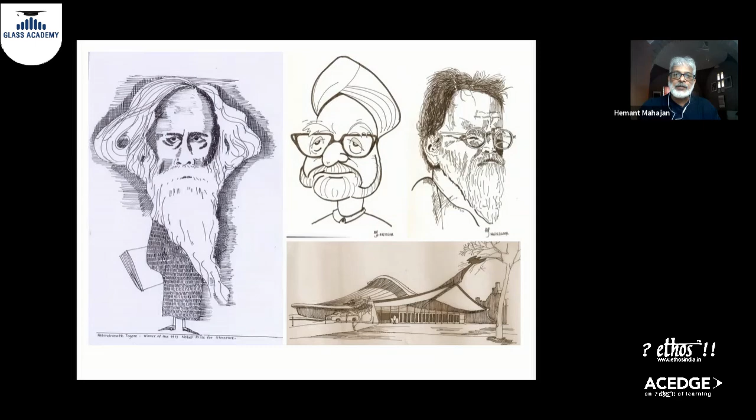But as an architect, why am I explaining all these sketches? Sketches for me are - I always started the work with sketching, with watercolors, sketching with pen and ink.

Last year only, we completed 3 decades of architecture. Every 10 years down the line, we do a program at our office, and we call all these personalities, our teachers, for their blessings.

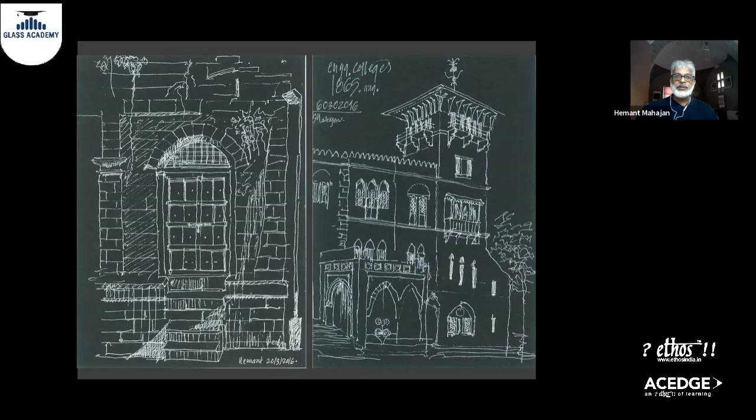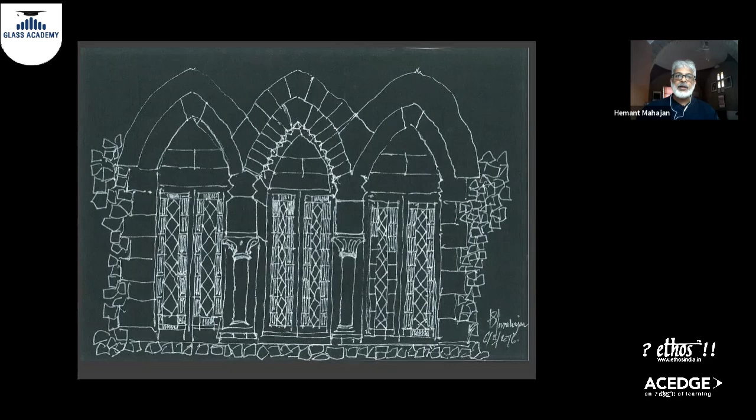Of the history, seeing the engineering college - this is the stonework. I enjoyed sketching with black and white, with color pens, the heritage of the old city.

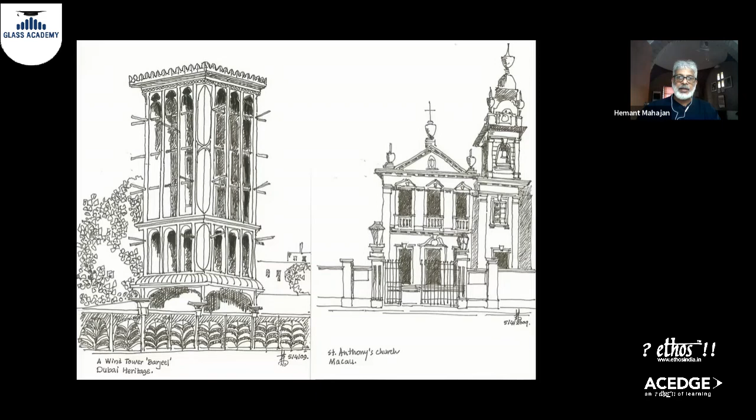Wherever we go for travel, I always started doing sketching. So with the sketching, I tried and imitated whatever I had seen - I saw the proportions, I saw the massing, composition, everything, and a different approach is developed while going through all these studies.

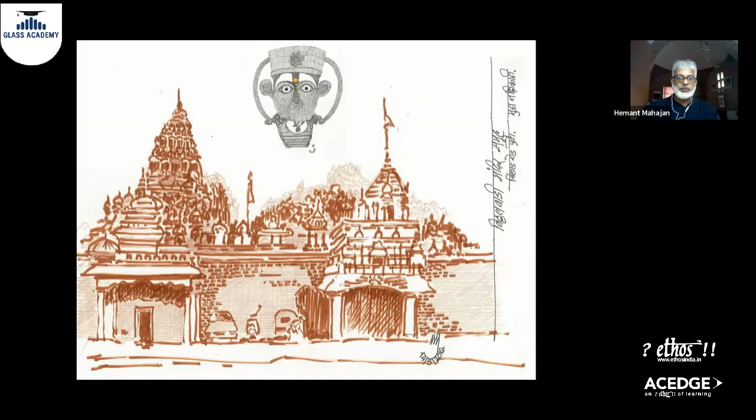So these are the different experimentations I did with color pencil, pastels, then markers, watercolors. These are the thrown out sketch pens which are dipped into water and sketches made out of that.

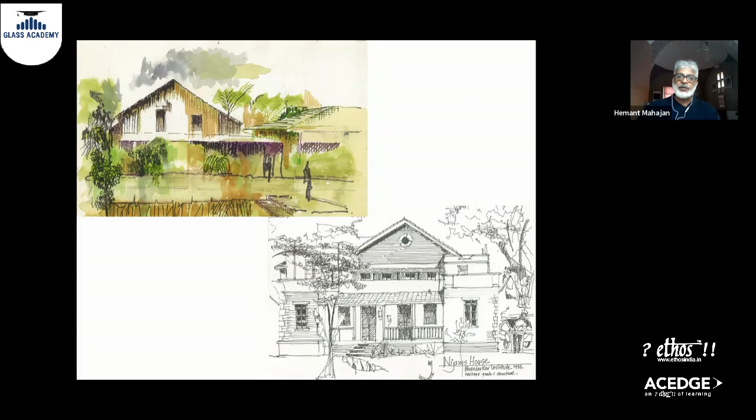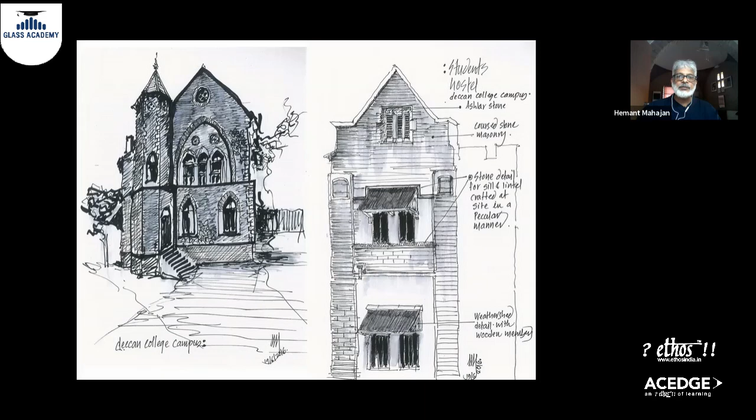Here again, studying the details of a 150-year-old structure and going into the details of construction technology. So through sketching, what I have learned till date - yes, I have studied the history. I made the analysis - geometry, scale, proportion, massing, etc. - have been studied because of this habit of sketching.

So for me, what is design? This is analysis, synthesis and evaluation. What are the aspects of design? These are my way of looking at design.

It is utility, functionality, originality, end user and aesthetics. These are the 5 prime points of importance for me to work on for the last 3 decades.

As a designer, every designer should have the goal to quickly provide the appropriate design solution. Whatever you design should be respectful to its setting, designed and constructed within a specified time and budget constraint. It should be innovative and serve the ultimate users.

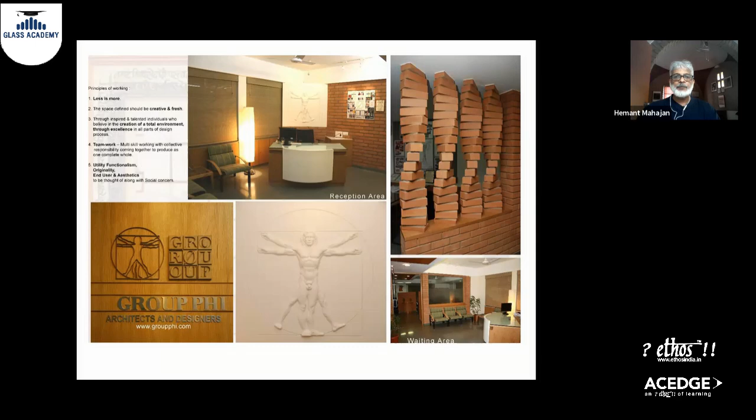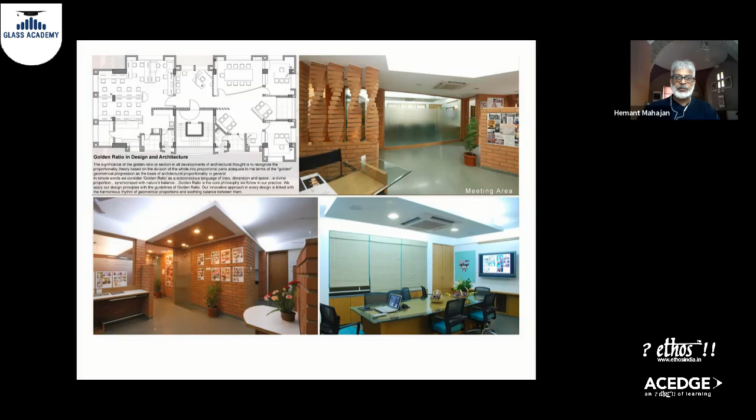It's a small office with segregation of staff, meeting rooms, a model space. Everything we do is displayed in a panel, before and after, inside the office to create a cheerful environment.

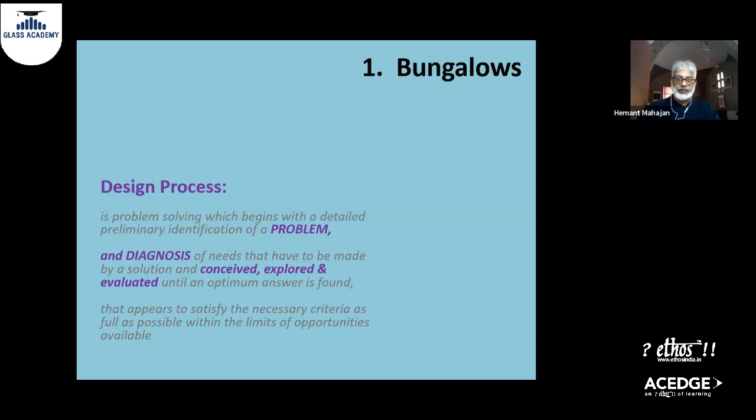So we'll start with the smallest bungalows. For me, design process is problem solving which begins with a detailed preliminary identification of a problem and diagnosis of needs, from which a solution is conceived, explored and evaluated until an optimum answer is found that satisfies the necessary criteria as fully as possible within the limits of available opportunities.

We'll go into the small bungalow, which is around 10,000 square feet plot. Regarding the owner's need, I'll go to the brief: the basic objective behind this project was to create a sustainable and energy efficient home for the family.

The house was designed for the husband, wife and their son. They wanted a new bungalow with a feel of warmth, comfort, and a very simplistic, down-to-earth, close to nature interior. The new house should be environment friendly, easy to maintain, yet have all modern automation facilities, and maximum connection of indoor spaces to the outdoor natural greenery surrounding the plot.

So this was the basis they gave us, and we developed this solution. On the lower level there's a study space; on the right side, servant quarters, then the car parking area, and a central area of around 3,000 square feet connecting the green spaces. At the first level are the bedrooms, living room, central court, and kitchen dining facility. At the second level, one bedroom and one study. So the requirement was small, but the masses and everything were developed accordingly.

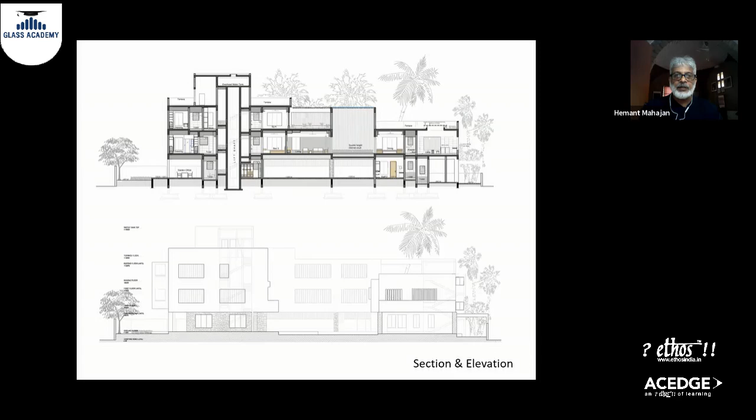The project is in an east-west direction. So this is the output. You can see the simplicity of the structure, the connection, the materials, the exploration of different forms. A tropical effect was tried and developed inside the campus.

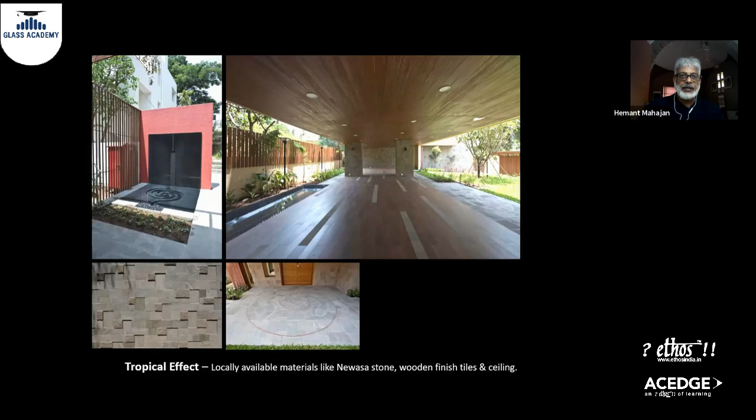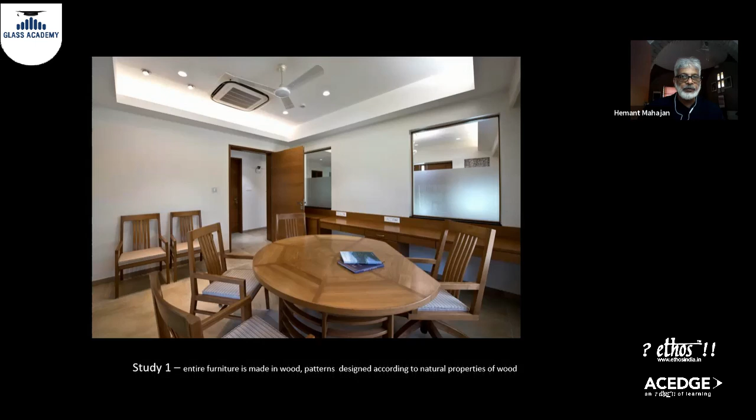This is the entrance lobby. The entire furniture is custom made and everything is indigenous. All the furniture, architecture, everything is designed in-house. See the colors, the freshness, the connectivity with the outdoors, the central court.

People always remind us of such spaces during the pandemic period. We received many phone calls from these resident owners saying they enjoyed this surrounding. Though they were not going out of the campus, they were in a different situation and still enjoyed life.

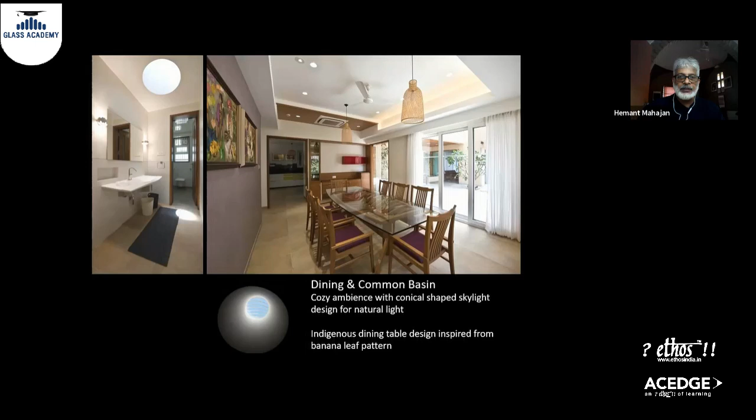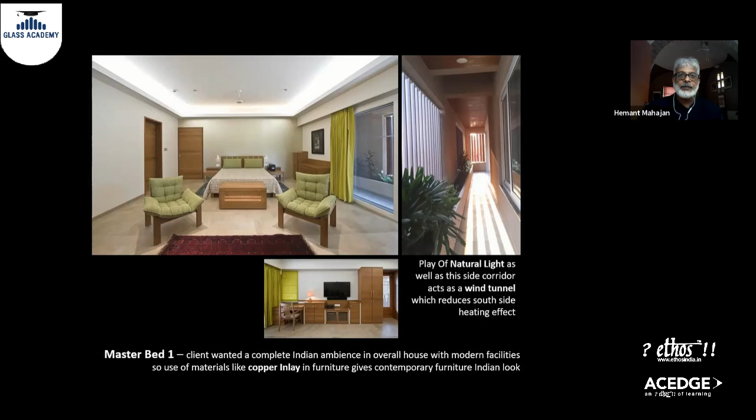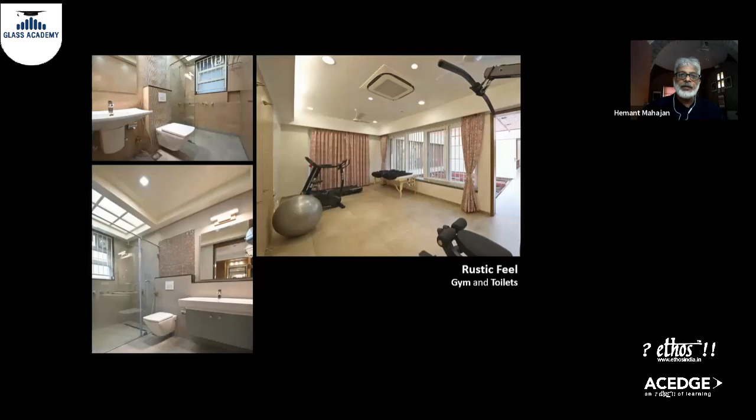You can see the outdoor connectivity, sun rays coming inside, the freshness of the tapestry and combinations, the play of natural light inside the corridors, making a buffer on the south side, a contemporary wooden look but with bright colors. Everything is designed as per the need of the person.

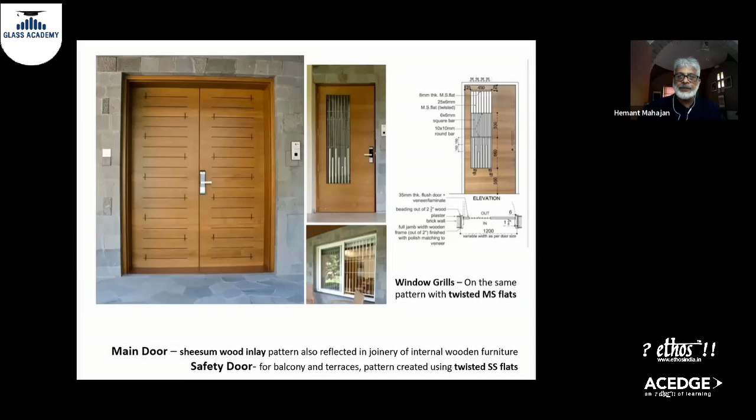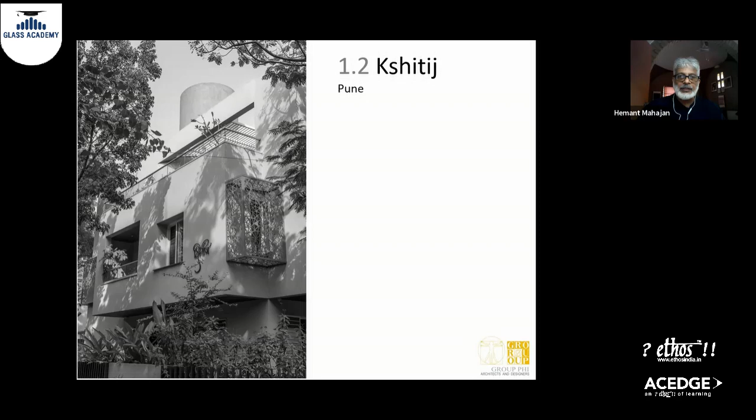This is the second bungalow, again for an industrialist. The industrialist has started a factory of laser cutting, and whatever they want to showcase, we have showcased their personality into the residence.

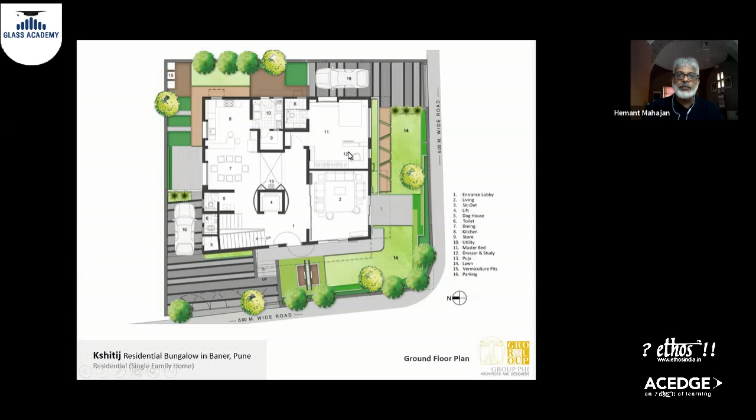The living, kitchen, dining, one master bedroom, with 1, 2, 3 bedrooms on the upper level for 2 sons, then music room, and on the terrace level, entertainment area with connecting outdoor spaces. You can see in section the different double height spaces as well as penetration of light you can see from the sky.

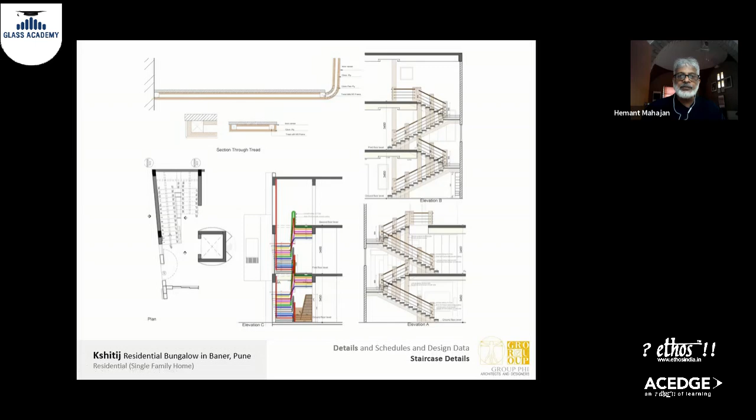The details of the staircase. Every element is designed as per the individual need.

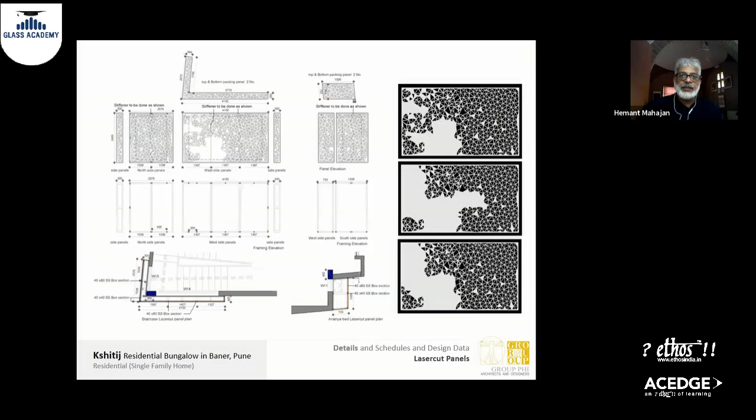The laser cut grills, again you can see this. So existing trees making an entrance for the bungalow - juxtapositioning made of each tree and entrance.

Even the 3D paintings were developed for the first time. Canvas we can say is always in 2 dimensions - we said why should we look at the canvas in 2 dimensions? So we developed the 3-dimensional painting and it changes as per our need, and we can change the combination.

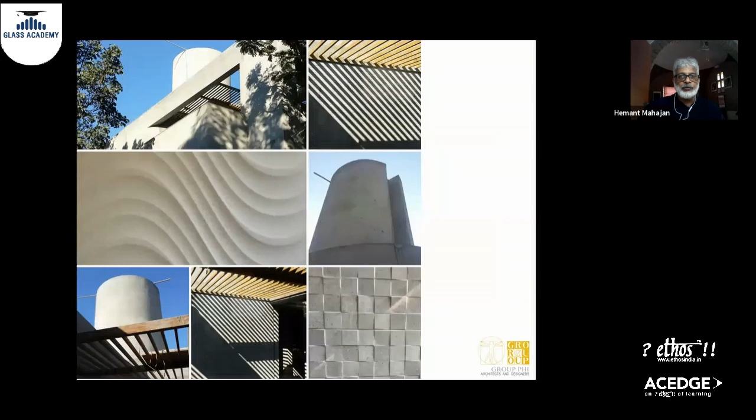During the site visit, always seeing the various combinations of shades and shadows, use of different colors, textures - it's an interplay of form merging with the nature.

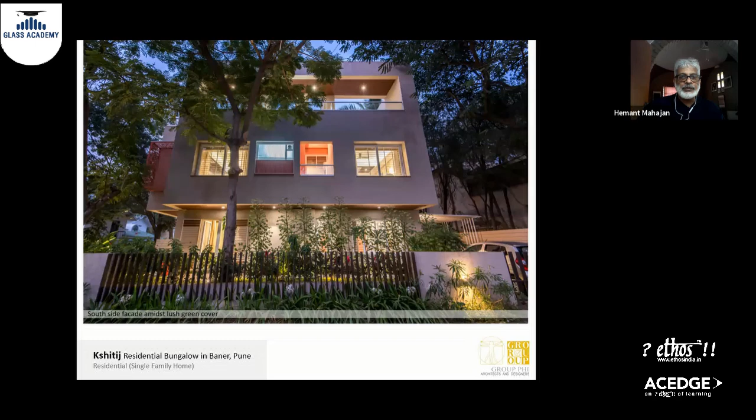This is the south side facade amidst the green cover. Again, the same thing - everybody enjoys such covered but connected with the outside world terrace. They enjoy their life at the lower level as well as at the upper level. Relaxing terraces, covered terraces, which are created for themselves.

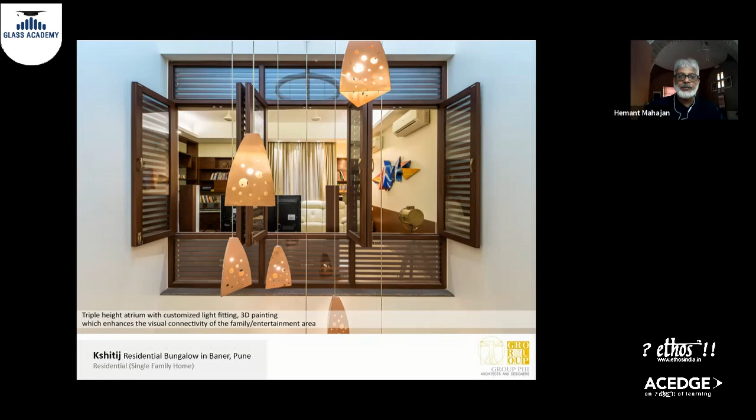Even these light fittings, which are displayed in the triple height area, have been designed from outside. Very fresh colored interiors, right up to the smallest detail has been thought of.

So design is a creative activity whose aim is to determine the form of the object, system, and environments at every level of production and activity.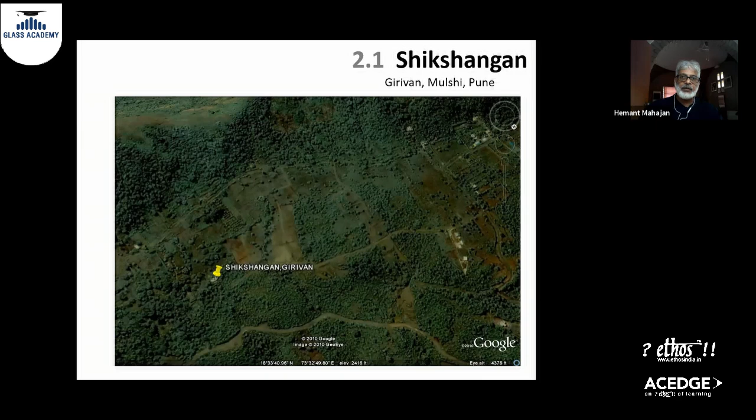Now this Shikshangan is a farmhouse located around 40 kilometers from the city of Pune, located on the uphills of Girivan. Here you can locate only a single house which was done 15 years before.

I will just read the owner's brief, because they have given a very fantastic background during the start of the project.

We have a beautiful piece of land up in the hills, which seemingly is at the end of the Western Ghats near Pune. Husband and wife have a dream of having a permanent residence on the top of this hill. We are looking at this as our primary home and not a weekend farmhouse.

In order to visualize the home for us, I need to brief you a bit about the kind of people and family we are. It is a mixed type of eclectic bunch, with Vijay who likes to spend a lot of time with books, reading and contemplation, and is a bit of a loner. Devika is also fond of a lot of reading, but includes music in her life along with theatre, and is largely a people's person. An older daughter is a product designer from NID, son-in-law again from NID.

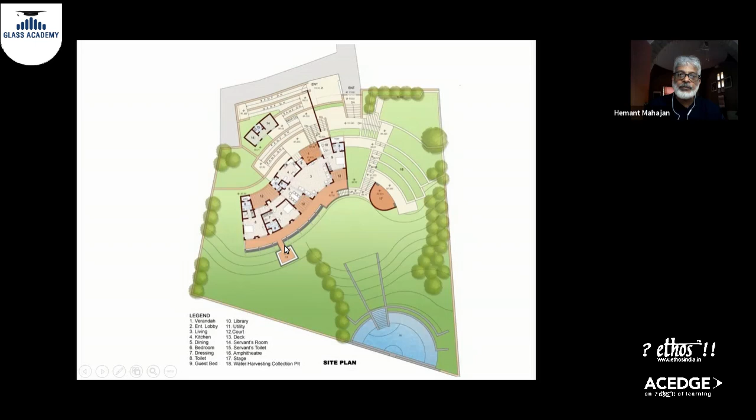You can just see the sectional development. So here we enter at the top level, and we have done this such type of farmhouse for the first time. And when we went to the site, we never recognized where the site location was.

And that's why we have created this bell tower. So whenever we are trying and approaching towards my home, we are always with that line of reference and we reach to the home.

So before the start of the work, we involve the owner and do the detailing up to the last detail and get confirmation from the owner - okay, this is what you want - and with respect to that, we execute the project.

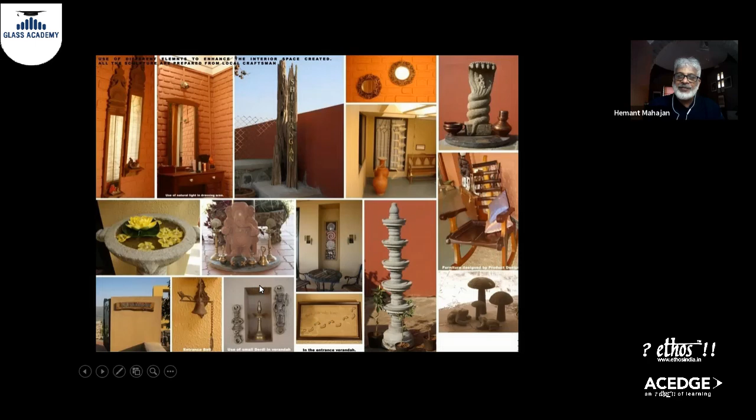A different element, full of energy and creativity. Even at the entrance of the home, what is written is 'keep your souls away'. We have not written 'keep your chappals outside', but 'keep your souls away'. This is the way we try to connect even with an outside person.

Now this is again a farmhouse, which is around 5 acres. We are trying to increase the area from 500 square feet to now 5 acres.

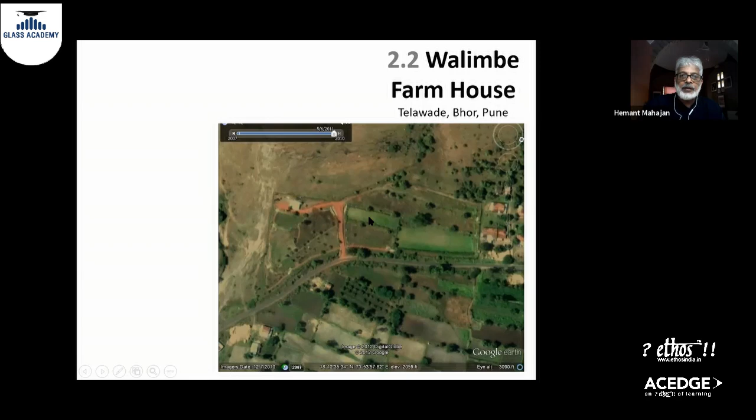When this person reached us, he said everything is done, the landscape is complete, and now you have to create a home. I asked whether this piece of land is sanctioned from the local authority. He said no, it's farmland and he is constructing on it. I said I will not do any unauthorized work, and started digging into the drawings and documents. It took around a year to get all the documents, and he patiently collected everything. Thereafter I said, this is what you have done, but it will not make a new structure for me, so I will create your structure in this new space where nothing has been touched by anybody else. Hence I started designing this farmhouse.

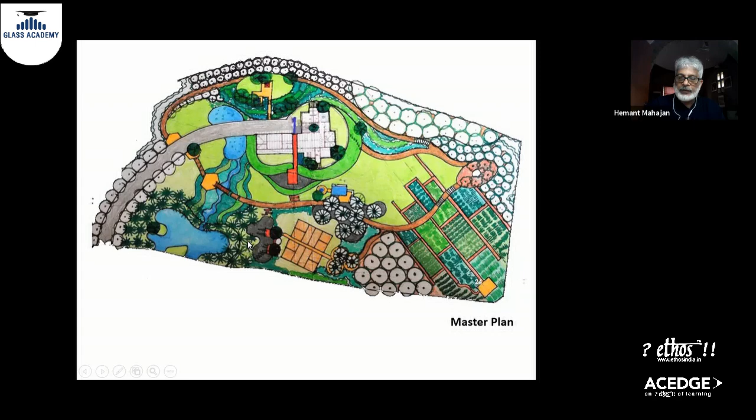We connected all the existing farming activity as it is, and they happily converted into the same thing. We restricted everything because of our budget, creating a boundary wall, and developed all the details within that area, keeping the rest of the area as it is, as per the existing landform.

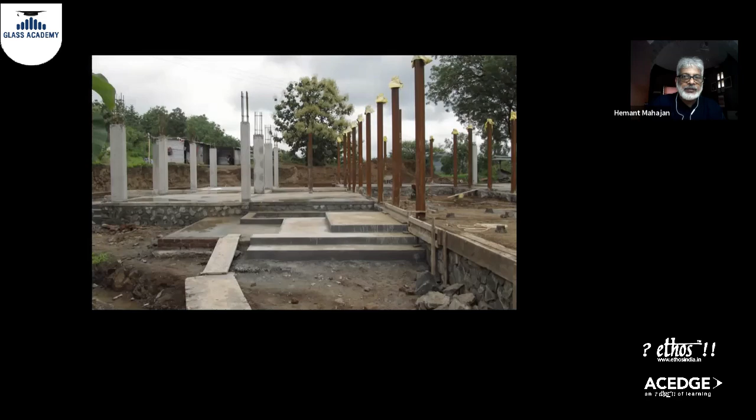Just see the sections - this is the start of development. Yes, at the start of development we always begin with landscaping, then creation at the structure level, and this is the finish. Everything was completed within a budget of 75 lakh.

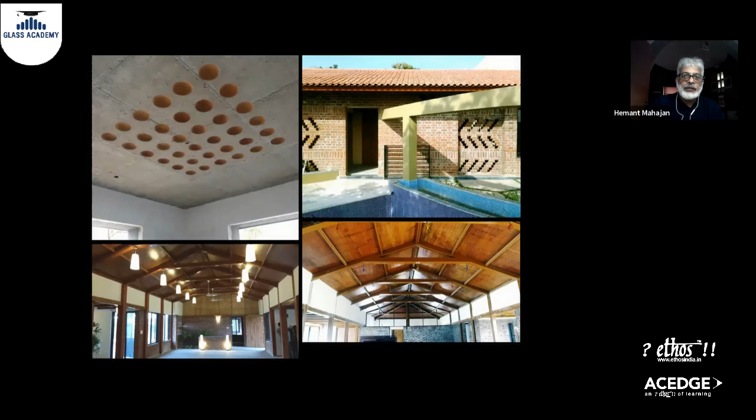We did an experimentation at the roof level. We did not use any grills, we did not use any windows - the brick jalis are my windows. No plastering, yes, exposed concrete as well as earthen pots. Use of natural light as well as outdoor space inside the toilet, and a Prabhavali creation for the puja.

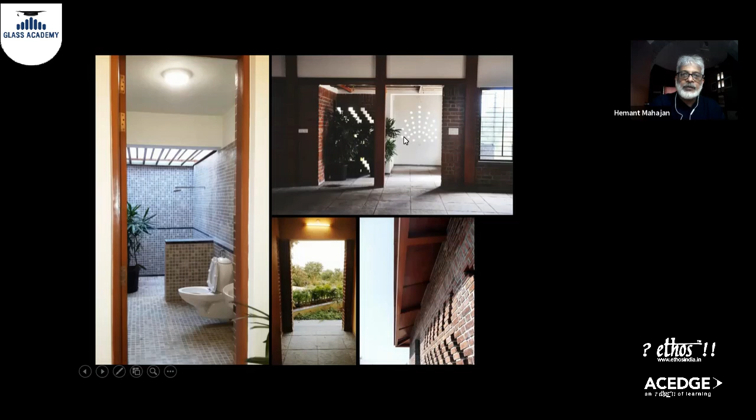So design is a product of a designer, and a product is a balance of both functional and visual elements.

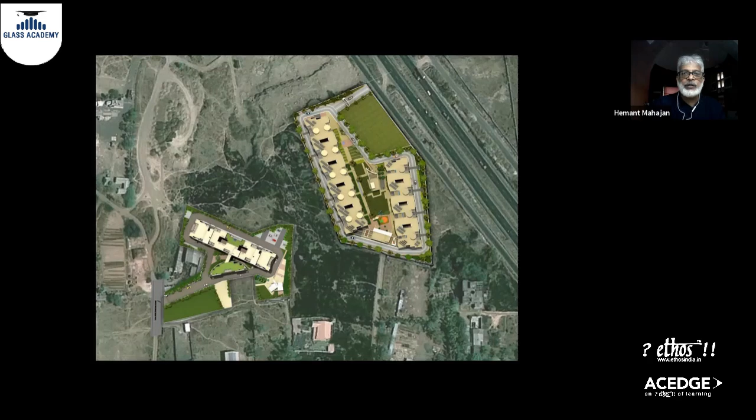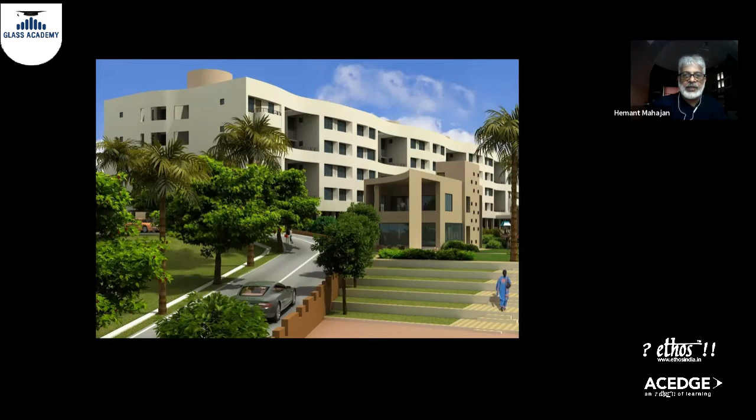On all sides, the level difference was significant, but we managed to create the architectural as well as landscape development in a beautiful manner. This is the reality.

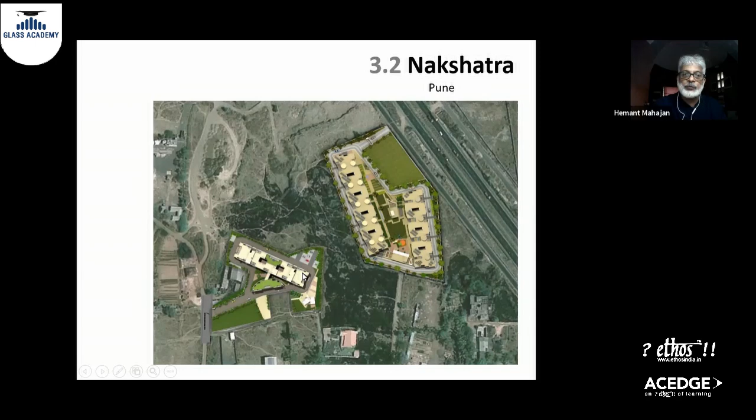The same developer has again taken additional land, and see the shape of the land. As per the shape of the land, respectful of the setting, the design has been developed in each case. Just see, in all cases wherever we go into the details of landscaping, each square inch is planned, meaning the smallest detail has been addressed by all the consultants.

We believe in teamwork. And this is the reality - respectful of the setting, the development is complete.

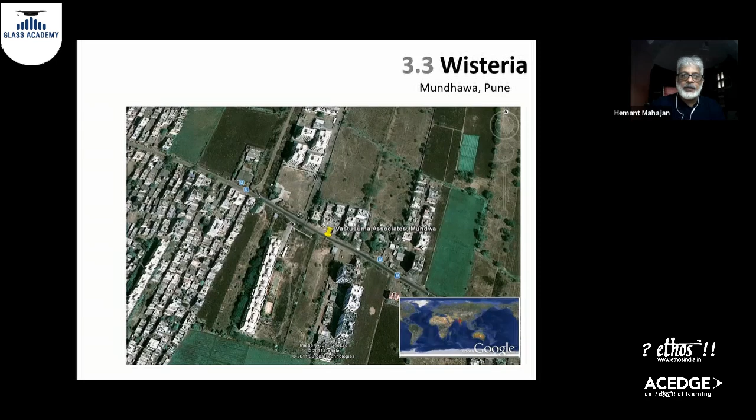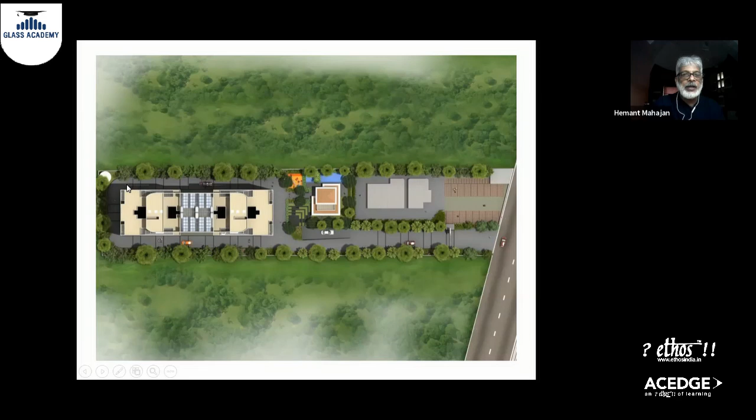Now this is on another side of the city, around Wisteria, with the site located in Mundhawa area. The site is very elongated, so as per this elongation, the site planning is done in a different manner. This is the amenity space, the central clubhouse activity, and these are the 80 tenements.

These are the spaces which are more utilized in this pandemic era, and I have visited all these places and families, and they are happily enjoying in such creation.

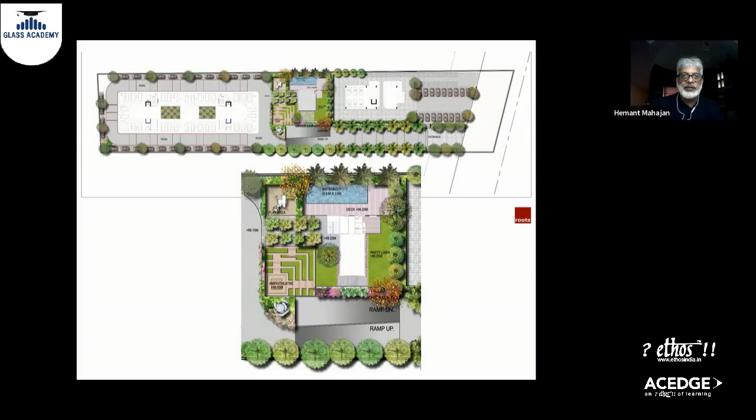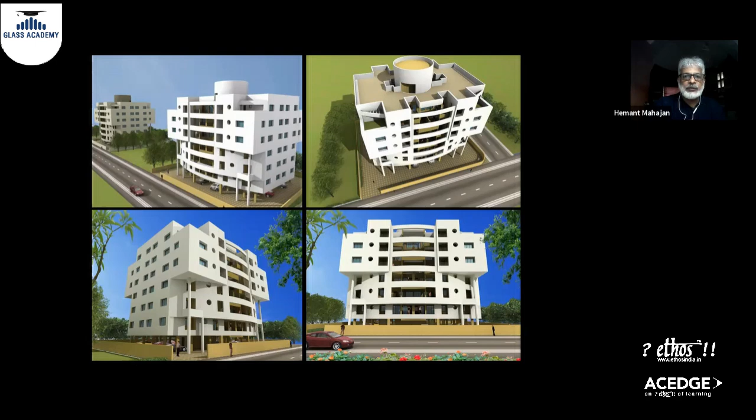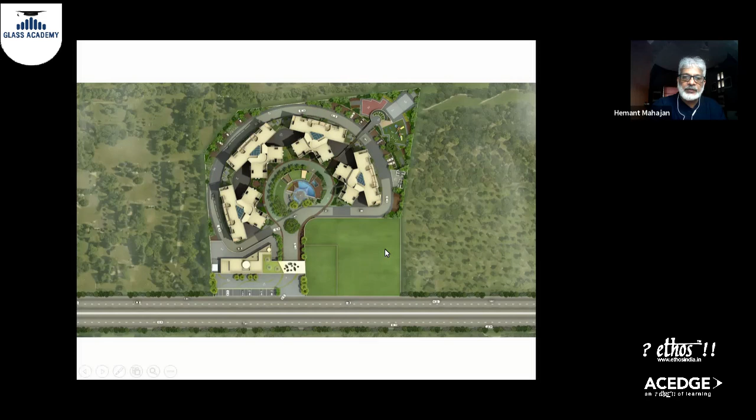We started 3 years back. The site has a level difference, so we created a 2-level parking below, but it has access to light and natural ventilation from all sides. This is the open space connected with all 4 buildings, and this is the additional open space we created apart from the regular need of 10%. This is the amenity space, and this is the commercial activity accessible from the outside.

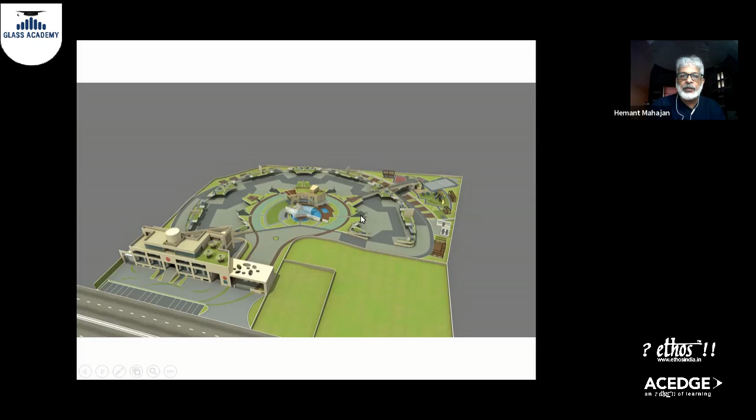Just see the site development, how connectivity has been done. Again, vehicular movement from all sides, with interconnection of pedestrian paths to all spaces without any confusion. And this is the final output.

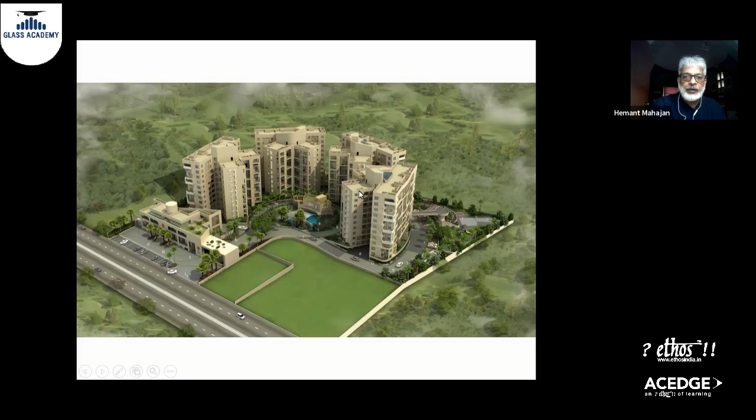At present, we have completed these 3 buildings. Due to the pandemic, the construction rate or speed is reduced, but this will be completed next year. All the flats range from 750 to 4,000 square feet, so the smallest person to the biggest families are residing in this campus, and everybody is given a different focus of attraction and well-being inside this community.

Everything at the top level with solar panels and rainwater harvesting, so all green norms are followed throughout all the projects. I am not mentioning it everywhere because this green practice has been followed throughout the last 30 years of our projects.

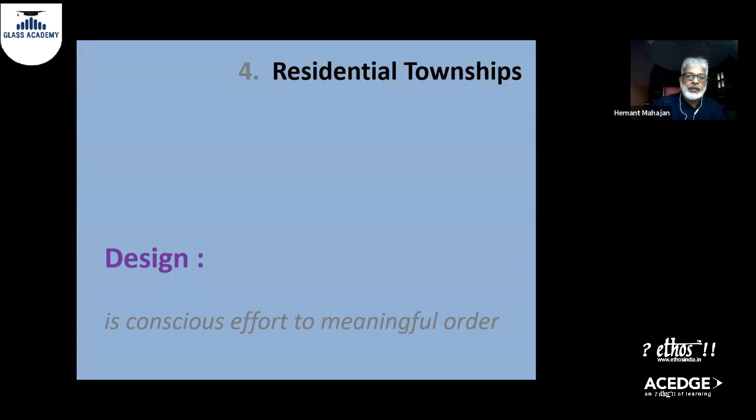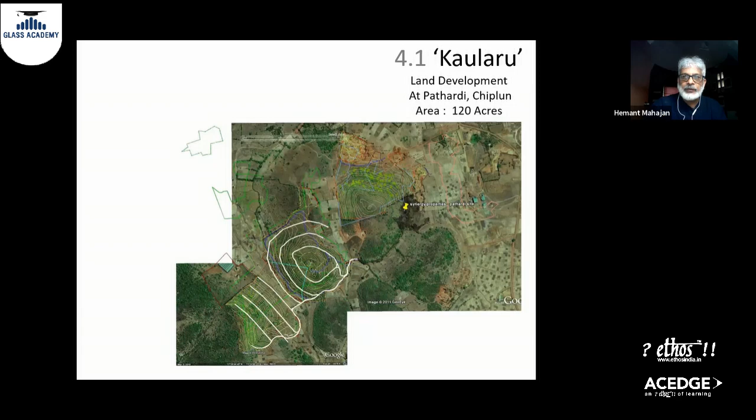Residential township. Design is a conscious effort towards a meaningful order. Now I will go into the 120 acres of planning which we have done for Pathardi, Chiplun.

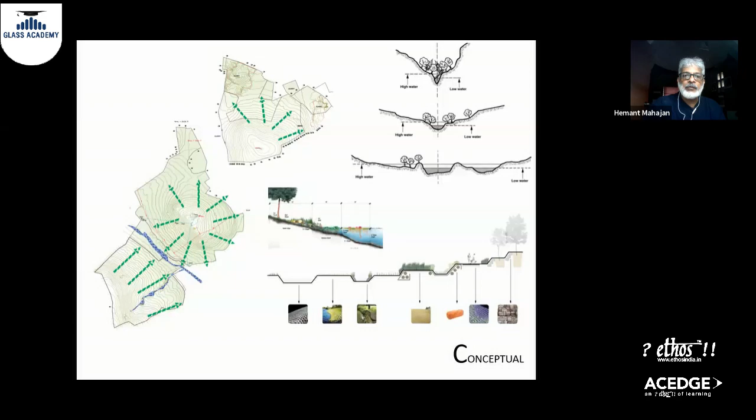Whenever we visit such places, we always go into the villages before starting the project. We study the city, we see the oldest development of the city, we study those characters, and with respect to that character our new typology and methodology has been set for our new design. So these are the first site visit, site features, the site and surroundings, and the study of the slopes and valleys. As per the regulation, the master planning is done.

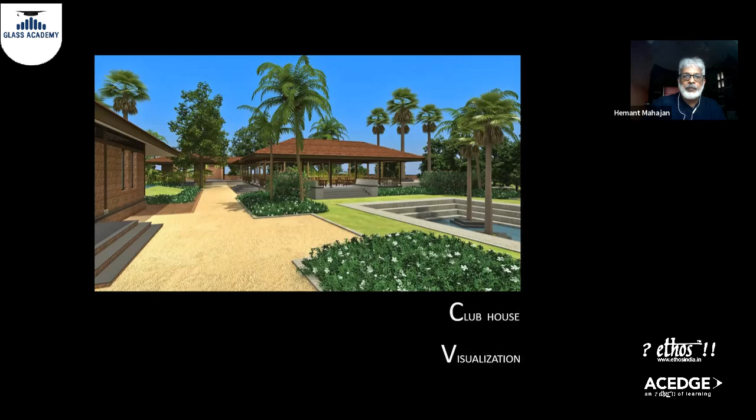Then phasing has been done of the 40 acre plot, with the conceptual development of the clubhouse, facilities, and amenity spaces. And this is the picturization of what we have done. Everything in the Konkan area is laterite, so these laterite stones are developed as the main basic stone material, and the development is done accordingly.

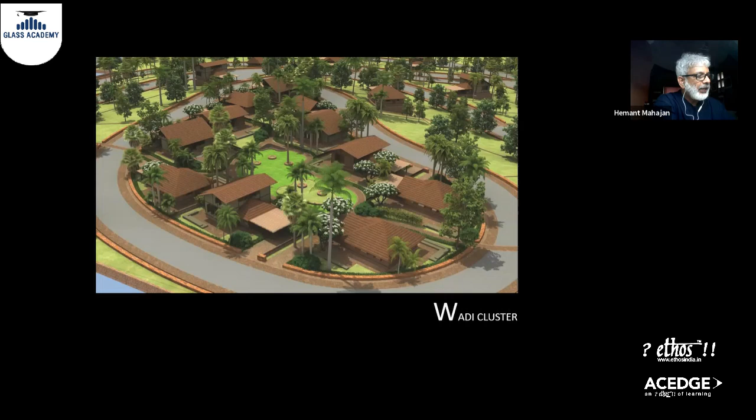The Wadi - I will go into the details of this Wadi cluster. What is this Wadi? The project is developed as an eco-friendly land development on the concept of cluster-based Wadi development, because of the site features of quarries, rainwater harvesting, and a holding tank for the entire land done at the lower end of the block. Our scope of work was not restricted to master planning, but all agricultural plots, road network, and everything inside this house as a holiday resort - spa, sauna, everything - was decided and designed from our side in an individualistic manner.

All these Wadi homes - each home is different with its own specification.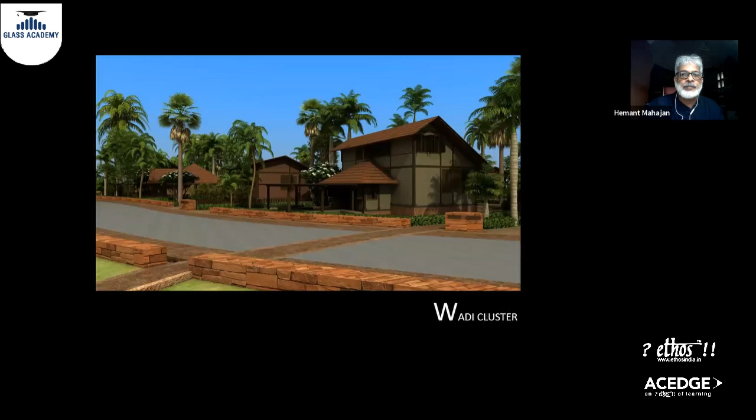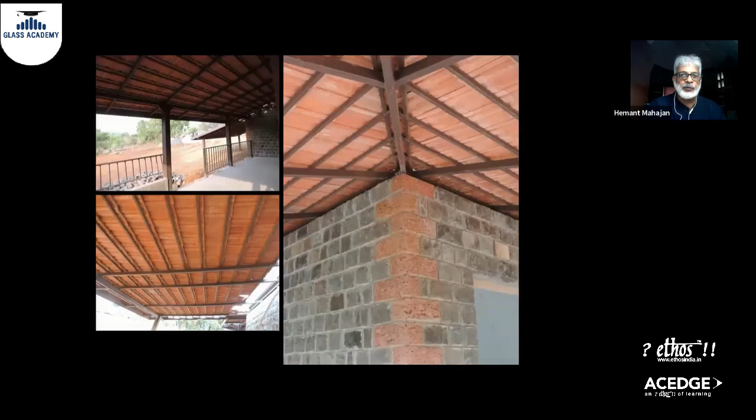Design is a professional service. Yesterday only we had a lecture of Balkrishna Doshi and Alvaro Siza, both Pritzker Prize winning architects. In their lecture also they mentioned that architecture is a service - a service of creating and developing concept and specifications that optimize the function, value and appearance of the product, communication system and mutual benefit of the user as well as the producer.

Now we are going to one girls' military school which is very close to my heart.

It is around 30 acres of campus, with around 720 students residing here. Why is it different? It is a girls' military school which was proposed bringing a revolution in girls' education in the regional context.

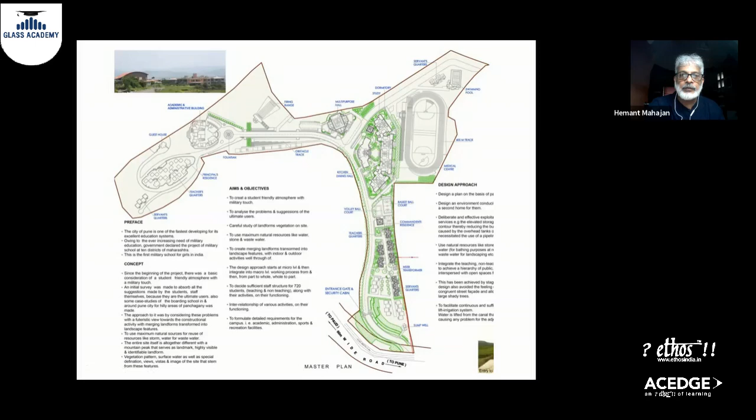There will be a natural education, but with a military touch, and hence this site was allocated by the government of Maharashtra. Just see the shape of the site - it has a level difference of 180 feet if this is 0. This was the biggest task while making the design, and we have successfully achieved this on site.

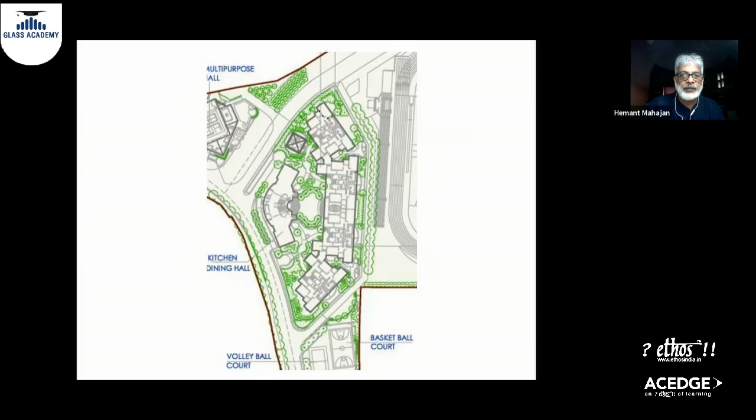Just see the level differences. These are the dormitories, each with a capacity of around 45 students. See how the students are well connected with the inside and outside spaces.

The buildings are in a straight manner, but the spaces are connected in this meandering form. Everything is a ground plus 1 story structure. Just see the small children from 5th standard to 12th standard.

All the planning is done in an inward looking manner, so teachers' housing will merge with the natural surrounding. Just see the teachers' quarters.

Again, the experimentation never stops in a single project. This is the school building for which we received an international award for the creation of this design.

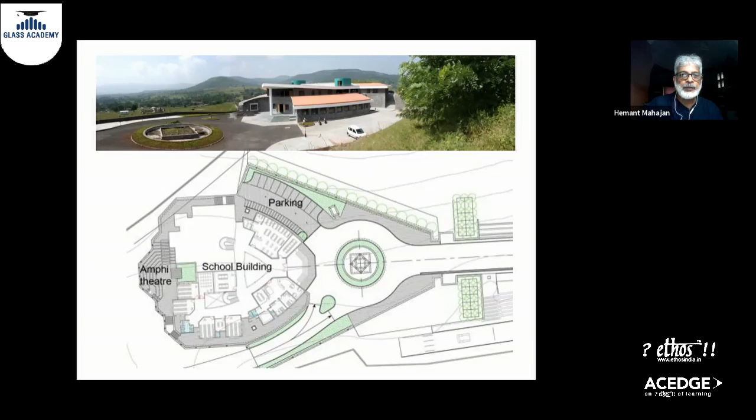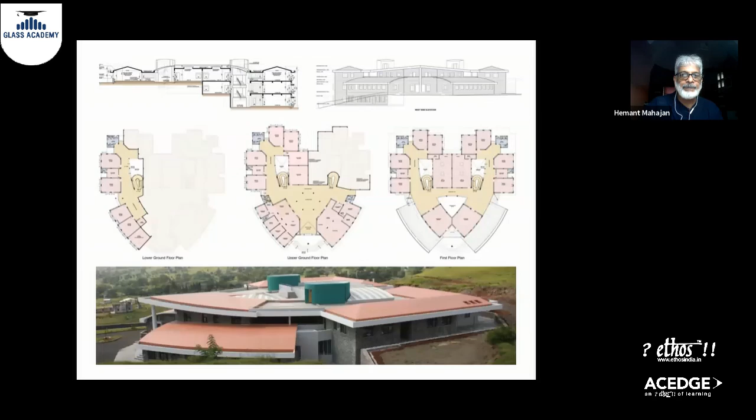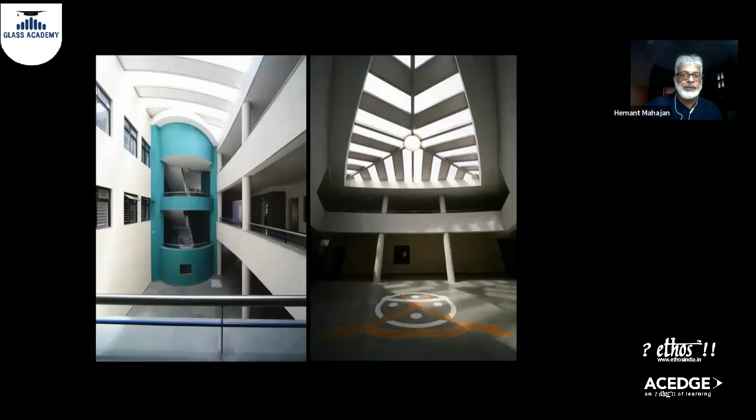On that side, you can see it is a ground story structure, but due to the level difference, it is two levels. See the connections. This is a multi-purpose hall. This is a badminton court.

Now I will be going through two small projects. Design begins with dissatisfaction and not with lethargy. We received or were shortlisted for this entry in the 2016 National Award in the institutional category.

Experimentation again with ferrocrete. Rainwater harvesting of around 7 lakh liters in a pond, and plantation of all the areas has been done.

Design is concerned with a positive search of solution. There can be no solution without a problem, no problem without a constraint, and no constraint without a need.

I will be showcasing a 4,800 tenement township around 500 acres near Abuja in Nigeria. So one person can start with a small sketch, small work, and go to this township level, but each square inch is planned as per the topography and the facilities.

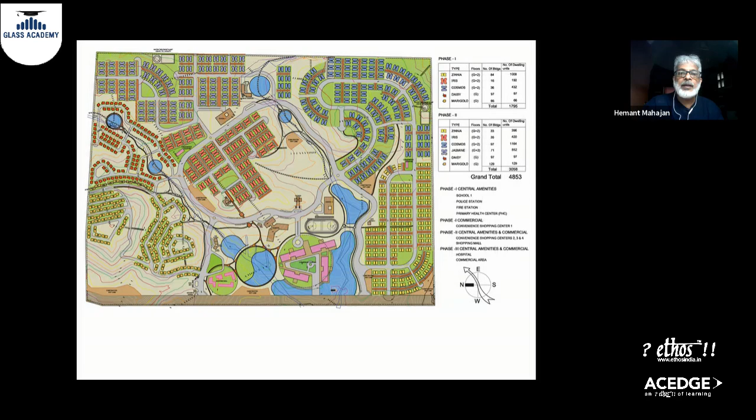And this is the adaptive reuse I will be showcasing. The responsibility for the relationship between industry and culture falls in the modern world on the shoulders of the designers.

This adaptive reuse has been done for the 90-year-old structure for the Bhandarkar Institute. They were using this structure as an old storage building, but as per the need, we changed the focus and said that the auditorium can be made inside the structure.

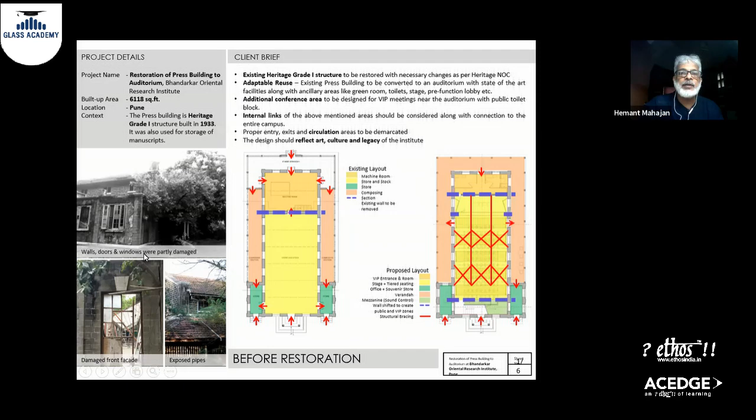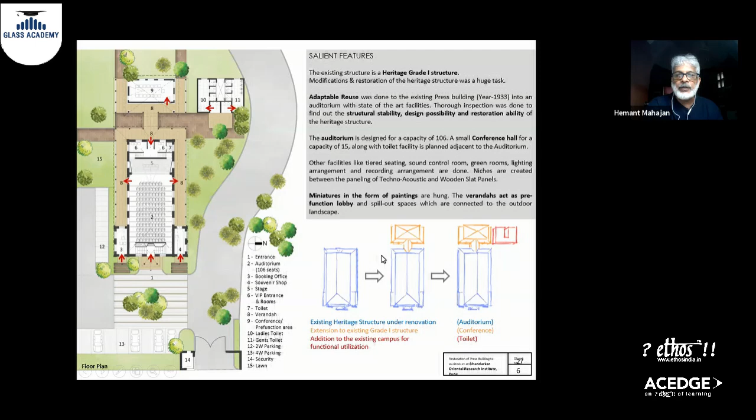Just see the outside area before the start of the restoration work. It was a grade 1 structure and we planned it in a beautiful manner. There was no toilet block, so a toilet block was created and conference room facilities were created outside. This is the transformation you can see from outside to inside.

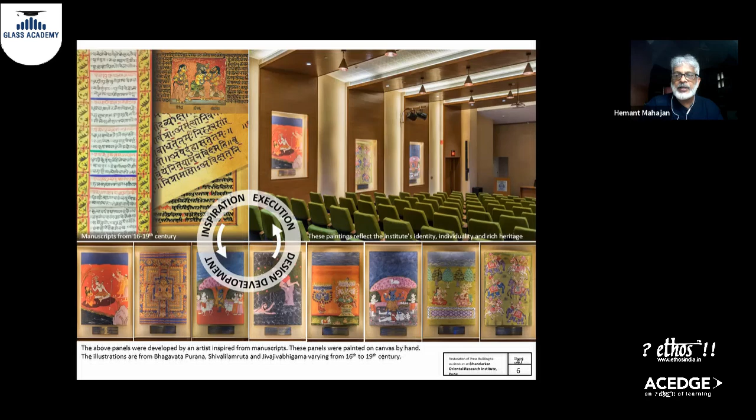Development along with the craftsmen, and these are the inspirations - manuscripts which inspired our development. This auditorium has been the most focused auditorium in the city of Pune in the last 2 years. These are the before and after of the restoration.

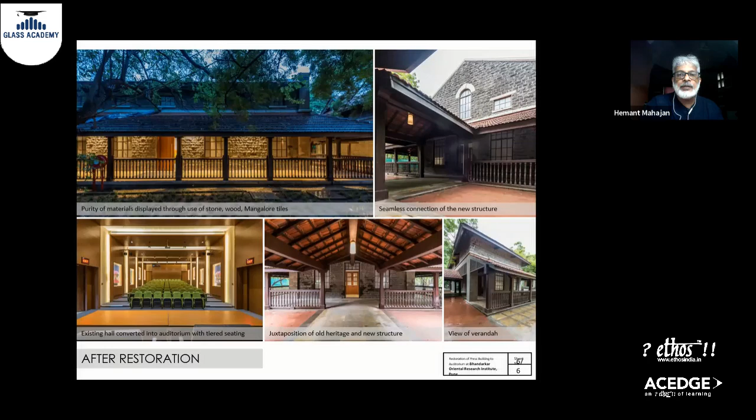If I want to create a successful design, it should comprise 3 elements: a good designer, a good client, and a good contractor. Because of this triangle, only good design will develop.

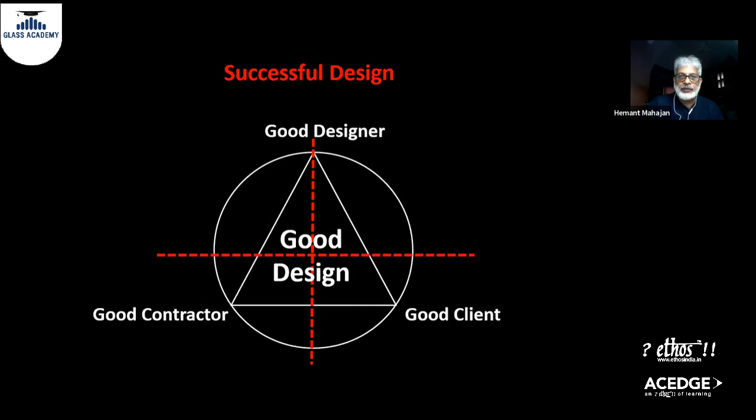Because of the analytical approach and value towards design that I have learned until today - the ability to think deeply, the ability to communicate effectively, the ability to foresee the future and make necessary corrective actions from time to time, and the ability to make things happen.

For me, after 3 decades of this service, we are creating in a definitely good manner and we are going to achieve excellence at all levels. Hence, the future is clean, the future is you, and the future is now. So it is my appeal to all the students and persons seeing this presentation to follow architecture with the most sincerity. Thank you and thanks for the opportunity.